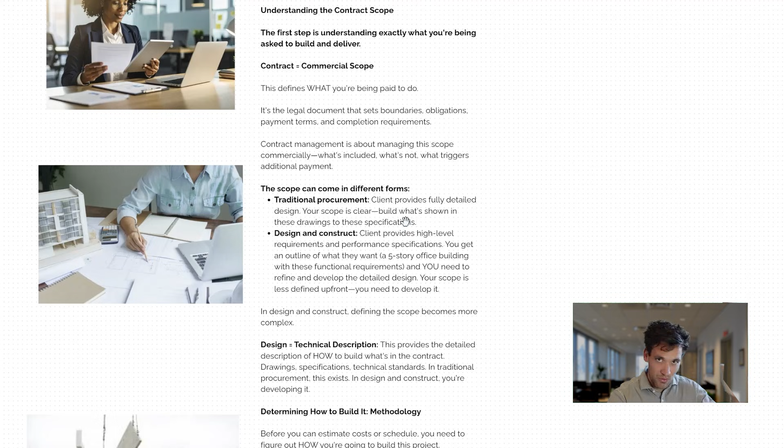So that's why, look, I know there are different procurement methods like alliances, cost plus, blah blah blah. But really, in terms of how most construction contracts are procured, when we're talking about between a project developer and general contractor, it either falls under this traditional construct-only procurement method or the design and construct method. And in design and construct, defining the project scope becomes much more complex, which takes us on to the design itself.

So the design is the technical description of the work. It's our drawings, it's our specifications that are telling us exactly what to build. These are the drawings that we can look at to work out how big the slab is, the depth of it, the density of steel reinforcement - basically what the product we're creating is.

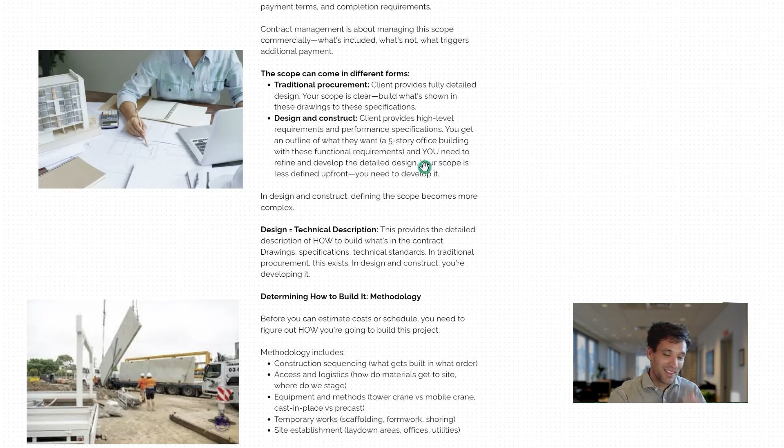Now, from the design - if it's a design and construct project, we'll only be getting a concept design or a rough outline, such as a project specification of what the client wants at this stage. Or if it's traditional procurement, we'll get an issue for construction design.

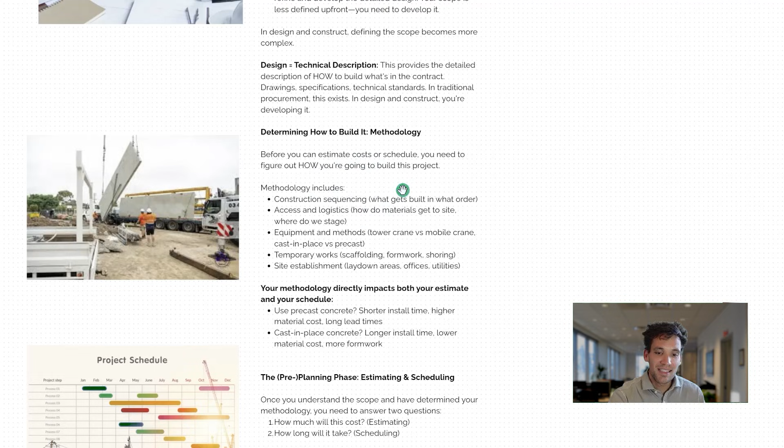We then move on to our next stage in the tender process. Once we've understood the project scope, we determine our methodology, which is establishing how we're proposing to deliver the project.

Now, if you think about it, you can't possibly produce an estimate or a schedule unless you understand how you're going to build something. Are you using in situ concrete, or are you going to be using precast? Are you going to self-perform the electrical works, or are you going to subcontract them? The methodology, our approach to delivering the project, is the key to both our estimate and our schedule.

Now, when I say methodology, I mean our construction sequencing, our access and logistics, our subcontract versus self-perform approach, our equipment and methodology, any temporary works we need, and our site establishment and layout. Are we having laydown facilities? What offices are we going to be having? What temporary utilities do we need to provide?

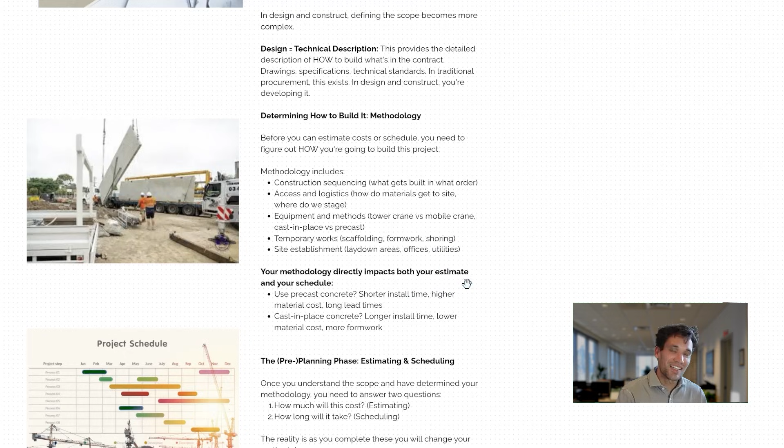This is the key to both producing an accurate estimate and schedule - properly understanding how we're going to deliver the project. Once you understand your approach for delivering the project, you can move on to creating your estimate and your schedule. Now, I'm listing these steps out sequentially, but they are iterative. When you go to price the project and develop your schedule, you're going to change your methodology. All these steps feed into each other.

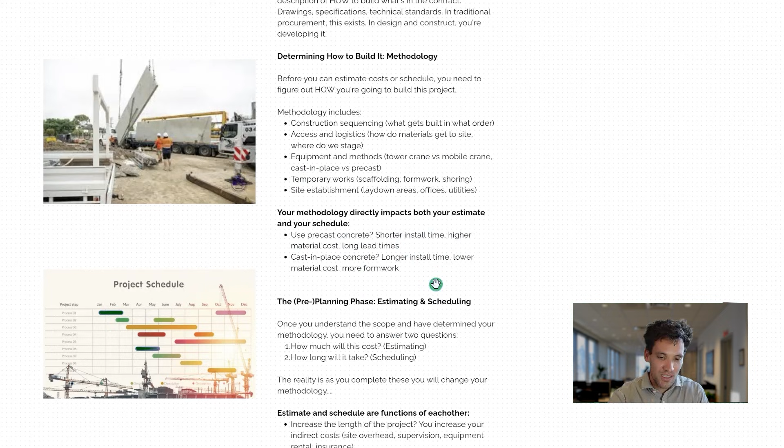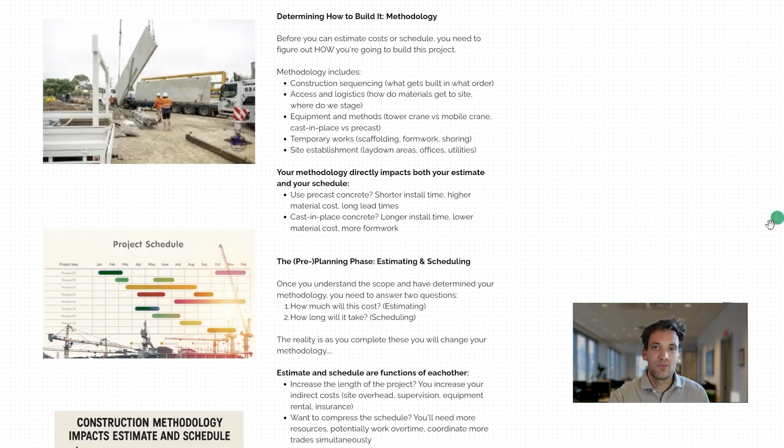If precast ends up being way more expensive than what you thought it would be, you might choose to go to in situ - it's going to take way longer, so again, you might choose to change the methodology. So these are iterative steps. Your methodology is going to be heavily informed by what things are going to cost and how long they're going to take. But fundamentally, you first need to understand the scope of the project, then you need to understand how you're planning to build it, and then from this, you can create your estimate and your schedule.

Now, as a bit of an aside, estimating tends to have this reputation as being a complicated skill or difficult to do. I actually think estimating is really quite simple. The hardest by far construction management skill that I see is scheduling. Estimating, working out how much something costs, is really working out what resources you need and applying rates to it. Obviously, it's a little bit more complicated than that. Scheduling adds this whole element of time.

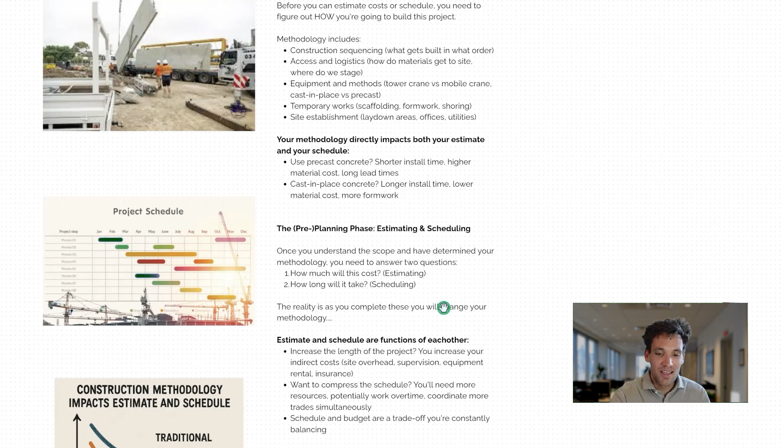You need to know the sequence that things happen, the way they relate to each other. You want to do enough detail that it captures the overall duration and you're estimating the planned finish date correctly, but you're not getting too into the detail that you're creating a plan that no one will ever follow.

I actually think scheduling is by far the most complicated construction management process.

Now, to prepare our estimate, again, we price our methodology. We work out what resources we need to deliver the project. To prepare our schedule, we work out how long each of these tasks are going to take and put them in the correct sequence and order.

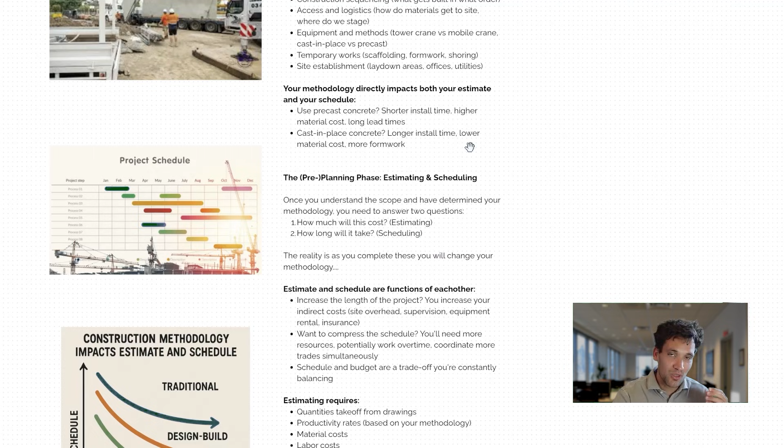Again, in the same way that these elements feed into our methodology, both the estimate and schedule will feed into each other. So if we increase the length of the project, it means we're paying for temporary office hire for longer, and for staff salaries for longer. So the schedule is actually a key input into the estimate.

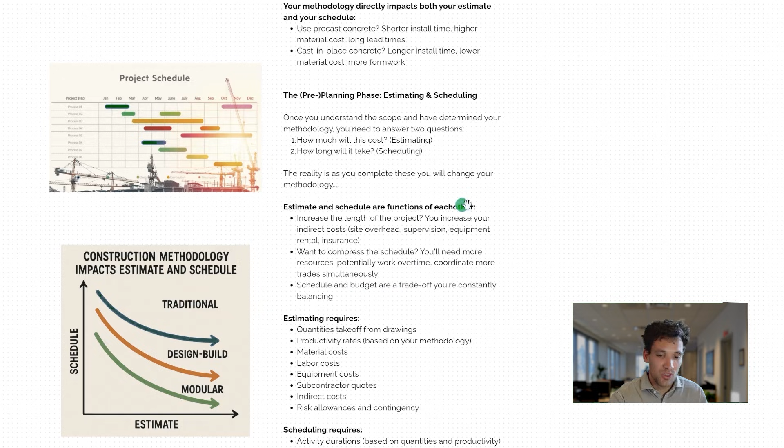On the other hand, if you're trying to get your costs for the project down, you may choose to change the sequence or methodology with which you deliver the project. You may choose to self-perform more things, in which case you need to allow more time to do it because it'll be continuous working of one work crew as opposed to using multiple subcontractors. So again, these two elements feed into each other.

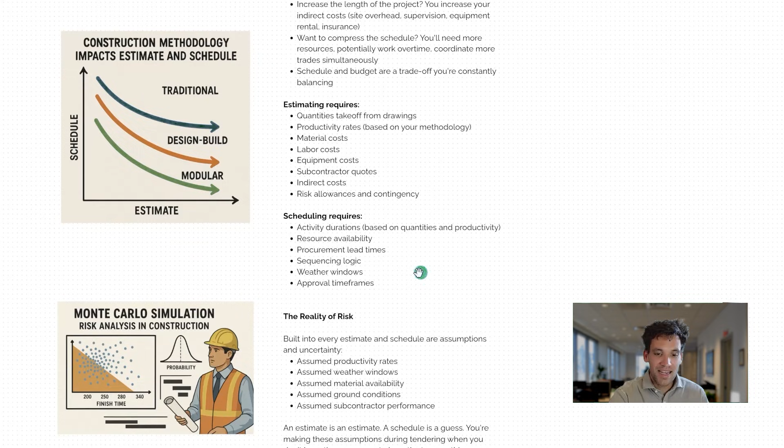Our estimate is going to be a function of our quantity takeoffs, our productivity rates for different tasks if we're self-performing, the material costs we're getting, the labor costs, the equipment cost, any subcontract quotes for packages we're outsourcing to other contractors, our indirect costs driven by the duration of the project, and any risk allowances and contingency.

Scheduling is going to be a combination of the activity durations, the resource availability, procurement lead times, the sequencing logic, what inclement weather we have to allow for, and what sort of approvals we need before starting the works.

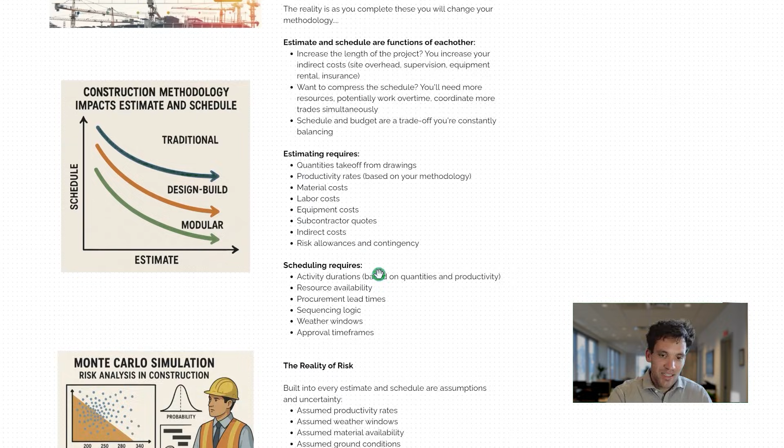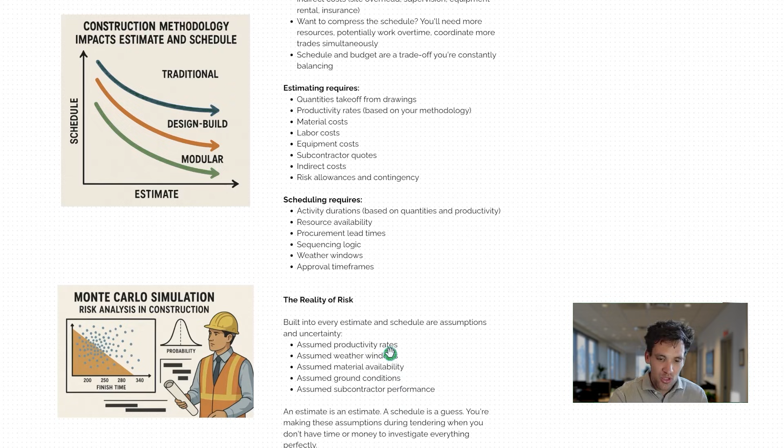Now, an estimate, a schedule, even a methodology is a prediction of how we're going to do the work. That means at this stage of the process, as we come towards signing a contract, we're introducing uncertainty and assumptions into our process. With our schedule and estimate, we're assuming productivity rates, amounts of weather, that we're going to get materials within a certain lead time, and certain ground conditions. Some of these risks we can quantify, some of them we won't be able to.

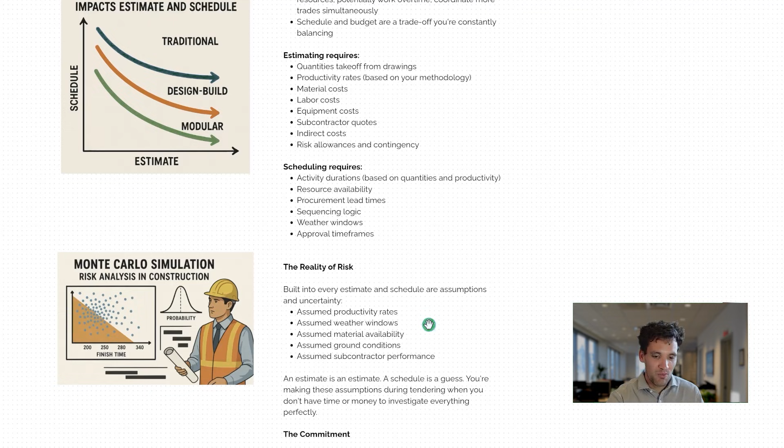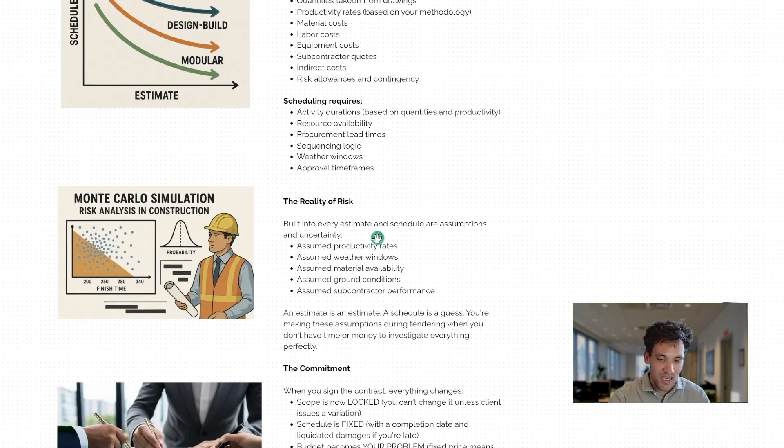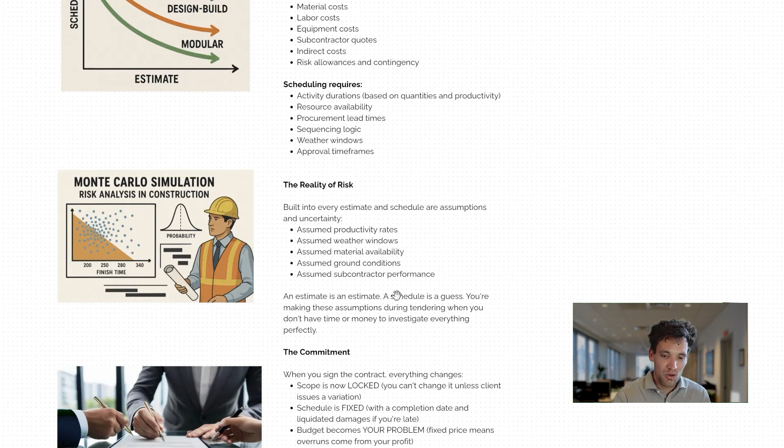So it's important to understand here, as much as we can do complicated things like Monte Carlo analysis and risk analysis, we are introducing uncertainty, and managing risk is one of the key responsibilities that construction contractors undertake. At the end of the day, as a construction contractor, you're providing a quote and signing a contract today to say, I can build this bridge for $5 million within 12 months. So it's important to understand that through this process, we're now starting to introduce uncertainty.

And when it comes to signing the contract, we're committing to taking responsibility and accountability for this uncertainty. So when we finally negotiate and sign the contract, if the client's happy with our price, schedule, and our proposal, the scope is now going to be locked in. We can't change anything unless through a variation from the client.

The schedule duration is now fixed. We're saying we can complete the works within a fixed time frame. If we go over that, we'll incur liquidated damages. The budget or cost of doing the works, assuming the scope doesn't change, is now our problem, and we are responsible for all the risk and assumptions we've made.

So step one, we've defined the project, we've agreed to do the works, the fixed works we've agreed to in the contract at a fixed price for a fixed duration. So we've defined what we're going to do, for how much, and for how long.

The next step in this process is to prepare. We're going to set up our project for success. This means developing an exact plan of how we're going to deliver the project in intricate detail, but also setting up guardrails that when it comes to delivering the project are going to help us stay on course.

The inputs to this process are going to be the secured contract, the tender documents, which will now become project documents as these were attached to the contract, and our preliminary schedule and budget we developed during the pre-construction phase. The outputs are going to be our detailed schedule, our exact plan for how we're going to do the work, our detailed budget and cost code set up, and our procurement complete, so we've negotiated and signed all our subcontract agreements.

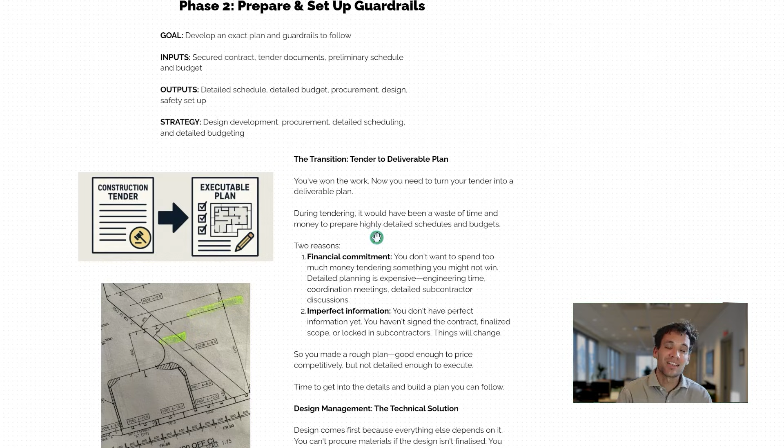Yes, we are on the hook for the project cost, the project duration, the project scope, but here's how we add detail to this and turn this tender into an executable plan. The point I'm making is we can't actually change our overall cost or overall schedule completion date because those are going to be fixed.

During the tender, it would have been a waste of time and money to prepare highly detailed schedules and budgets. So really, we're just taking this information and extending it out. During tendering, we don't want to spend too much money preparing a proposal for a project we might not eventually do. So it would have been a waste of money during the tender phase to create a very detailed plan.

On top of that, we just don't have the perfect information to complete the plan, particularly if it's a design and construct project where we're only doing the detailed design after contract signing. We can't actually create very detailed schedules and detailed budgets until we do have some form of accurate design.

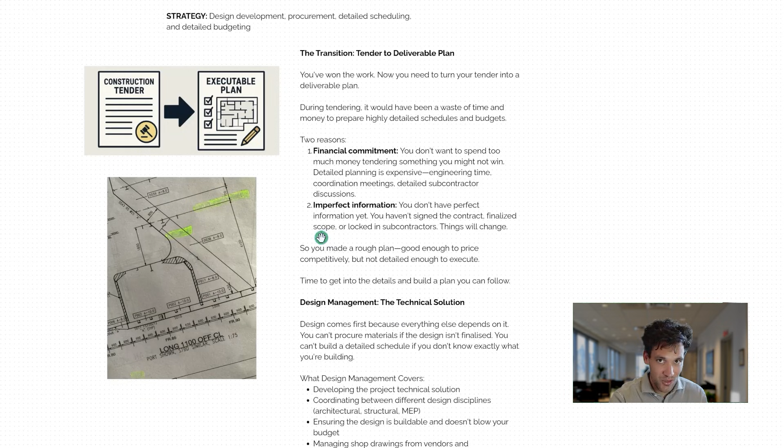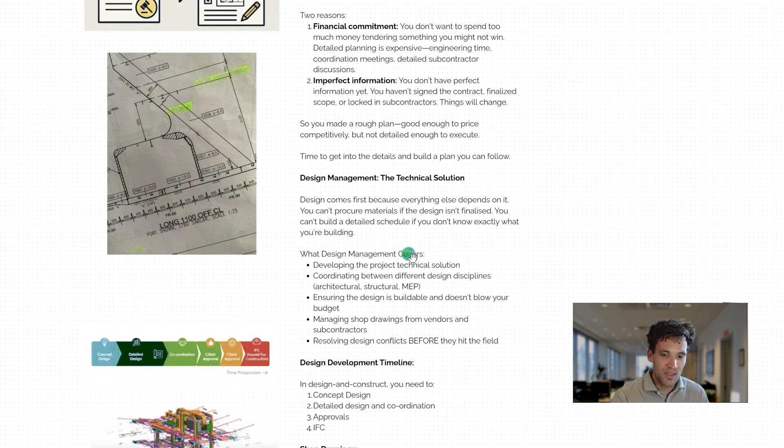Now, the start of this process is design management and developing the project technical solution. If it is a traditional procurement methodology or construct-only project, the client will be issuing us an IFC design. However, even if you do get a full IFC design, you will still have some design development to do through the procurement process. For example, shop drawings, fabrication samples - I would classify these as design development, where we are doing our detailed shop drawings, working out exactly what we're going to procure, and that would still have to be approved by an owner or architect.

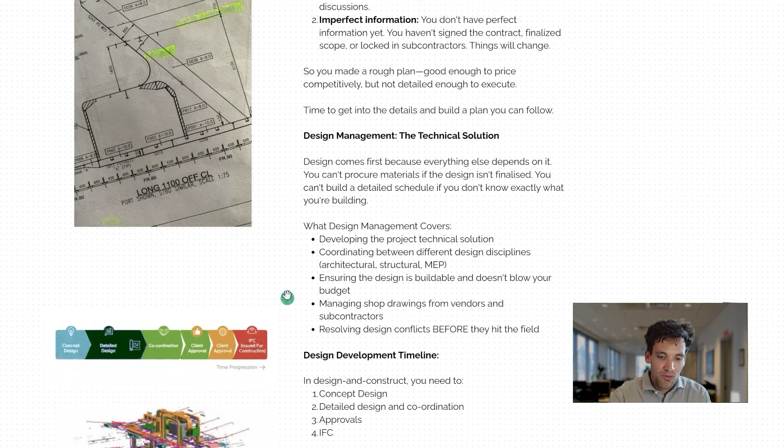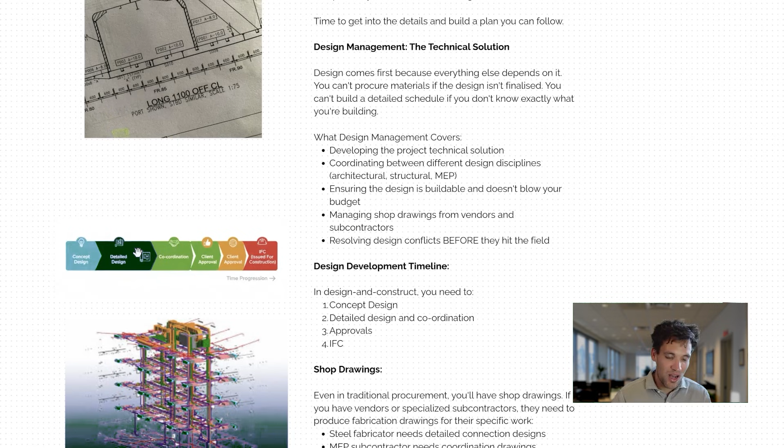Obviously, if we are performing a full detailed design as part of a design and construct project, the design management portion of this is going to be much more important. We're going to start with our basic concept design, which are the indicative requirements that we priced off at the tender. We then need to engage an engineer or architect team to complete our detailed design. They take all this concept design and work out, from basic sketches, exactly what we're going to build, how thick every wall is going to be, exactly where every light fitting is going.

Then we need to coordinate this design between all the different disciplines - MEP, structural, fit out, services, whatever. Then we need to get this design approved by our client. They have to sign off and agree to it. Then we can begin actually constructing towards this design and we get the IFC stamp.

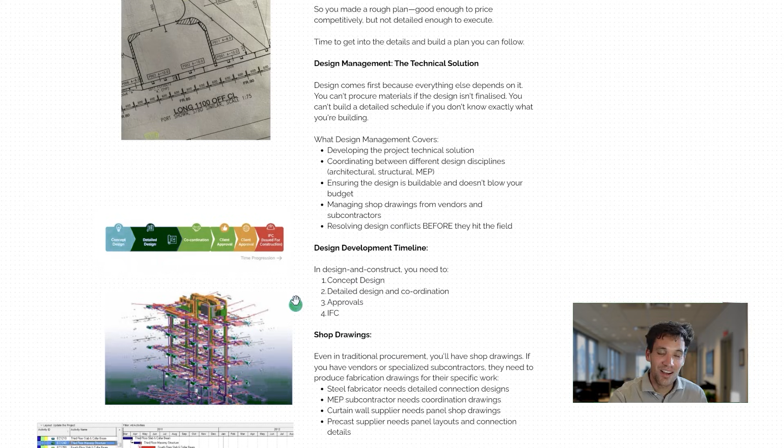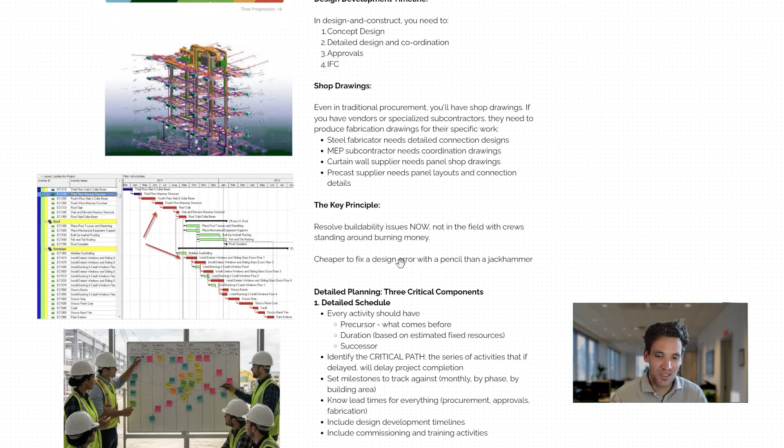Even under a traditional construct-only contract, you will have some level of design management, and this would come through vendor shop drawings, things like steel fabrication drawings or precast concrete drawings. The key principle behind design management is you want to resolve all the constructability issues on the drawings before you get to the project. Again, it's cheaper to fix a design error with a pencil than a jackhammer.

Yeah, the design is obviously going to be the basis of everything we do, as it's the instructions of what we actually have to build.

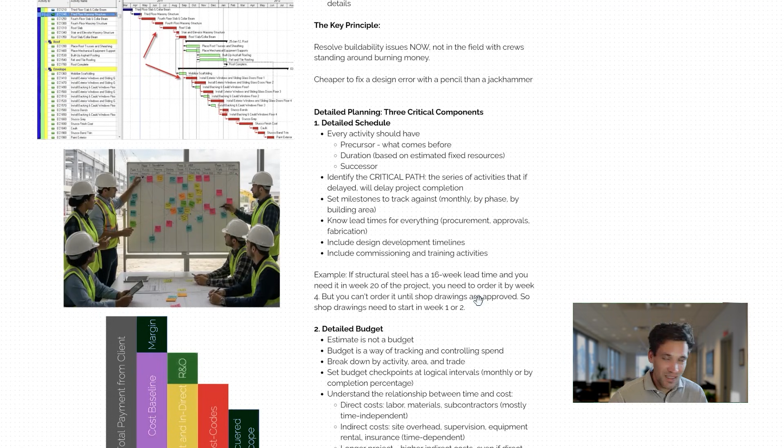The next part of the detailed planning phase is getting into developing our detailed schedule and our detailed budget. Now, I like to think of these two as our guardrails for the project. They're going to tell us, when it comes to project execution, have we missed activities? Are we falling behind schedule? Or for our budget, are we overspending in certain areas?

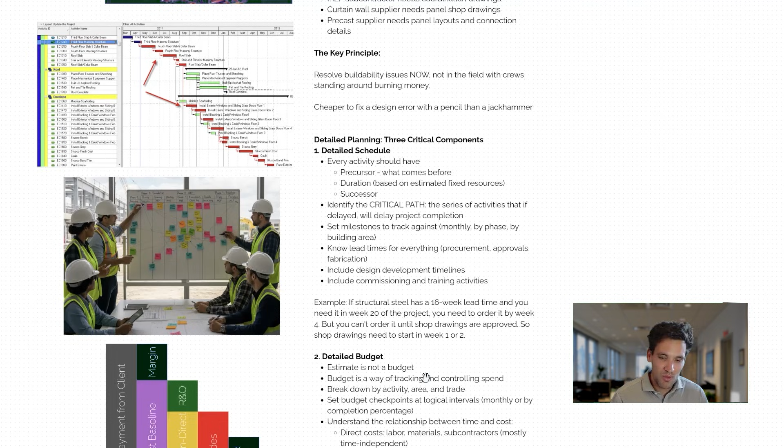The whole purpose of having a detailed schedule and a detailed budget is partly that it's instructions, capturing our plan of how we're going to deliver the project so it's easy to follow and communicate. But also it's a way of knowing as we go off track.

So our schedule captures our entire methodology. It captures every activity in the project, what comes before it - referred to as its precursor - the duration of the activity based on our estimated resources we're going to apply to the task, and also our successor: after that task is done, what comes next?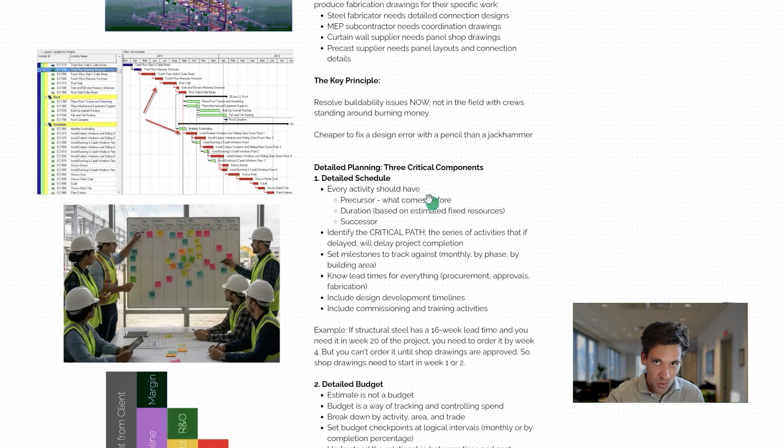The key concept to understand with scheduling is the critical path, and in my experience, most people use the term incorrectly. They throw it around everywhere. The critical path is the series of activities that, if delayed, delay project completion.

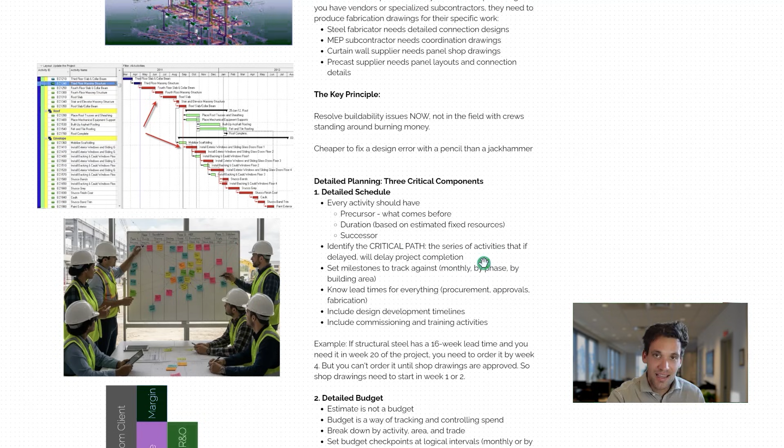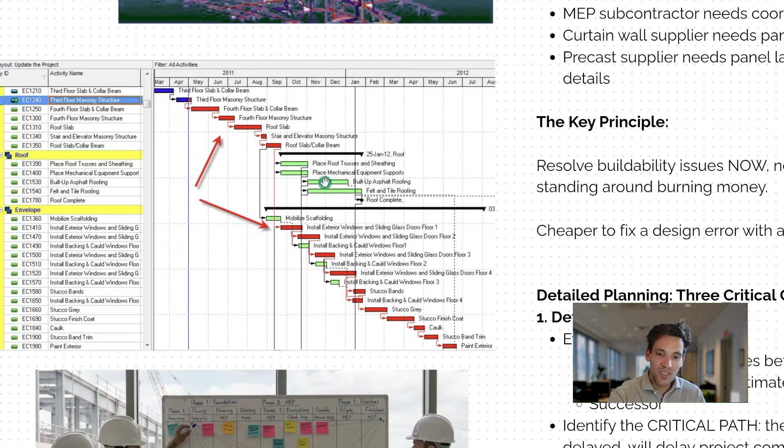So if you look at this simple diagram of a project schedule, you can see the activities in red, the way they're sequenced. If any of these activities push out, it's going to push out the finish date. These activities in green that aren't linked in that series of tasks, you can extend those activities and it's not going to extend the finish date. So the red activities are the critical path. The green activities have some level of float associated with them.

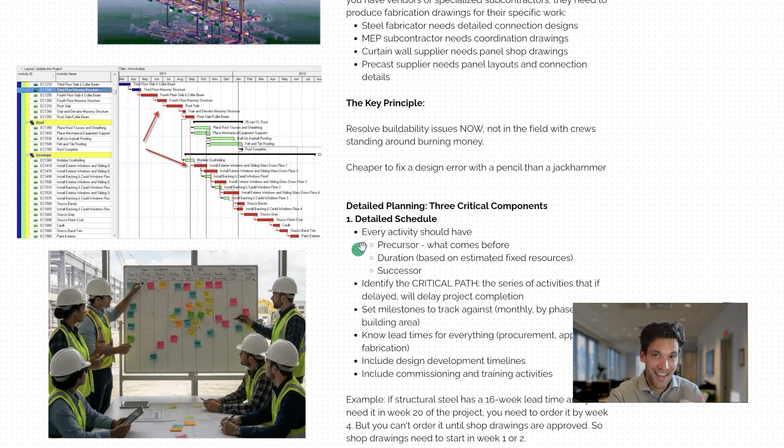Again, if you can delay an activity and it doesn't impact the completion date, by definition, it's not on the critical path. To put together this schedule, we need to have a really good understanding of the methodology. This means understanding the lead times for everything, procurement, fabrication, approvals by the client, the entire design development process, and any completion, commissioning, handover activities.

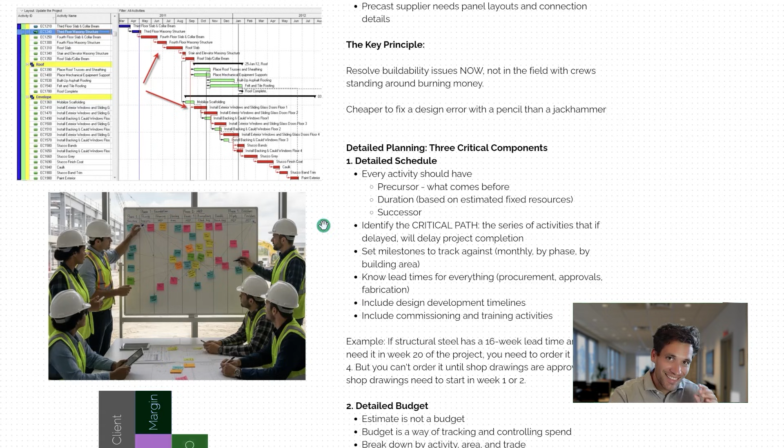Now, when these schedules are done well, they are instructions of how to deliver the work, but they also immediately flag when things aren't going right. Say, for example, we know our structural steel has a 16-week lead time and our installation, which is on the critical path, starts in week 20. If we know from this that we need to order the structural steel by week 4, and the shop drawings need 2 weeks to get approved, we know that if we haven't submitted the shop drawings by the end of week 2, we're already going to delay our completion date. And that is the power of correctly linked schedules. You know very early on when something is going to go wrong.

Now, in the same way we're going to develop a much more detailed schedule, we're also going to create a much more detailed budget. So to be clear, an estimate is not a budget. An estimate is a way of compiling all of the project costs, but it's done with the ease of pricing accuracy. It's not done to track and control expenditure.

For example, when you're pricing a project, say a concrete project, you might include formwork in every line item, but in reality, you're just going to place one order for all of the formwork for the project at the start of the job. In that situation, I think it's much cleaner and easier to track if you have a material budget called formwork material that applies to all the activities. When you're estimating, you want to allow for formwork for each of the tasks. It's hard to just make a bucket allowance for formwork for the whole project.

When you're talking about setting up a budget, you want to allocate your budget in a way that makes sense with how you're purchasing, how you're spending money. So for example, we know when we're ordering formwork, we order this amount, and if we go over what we've allocated for it, we're flagging a budget overspend.

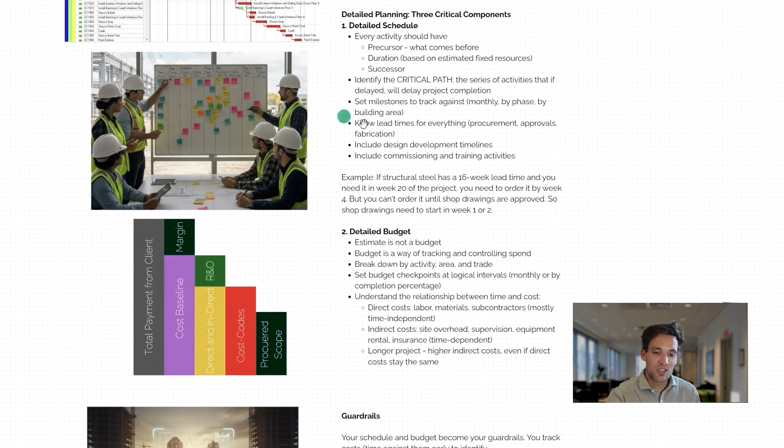Now, again, it's important here to understand the relationship between time and cost, to understand our direct costs, which will be mostly time independent tasks, which are going to be a function of our labor, materials, and subcontract costs. Also understand our indirect costs, which are going to be driven by the project schedule. Again, longer project means higher indirect costs.

Now, I don't want to keep going on and on about this, but the true value of detailed schedules and detailed budgets is you set up guardrails for how to deliver the project. You know whether you're overspending at the 15% mark rather than the 95% mark, where you can still do something about it.

Now, the next key thing we need to do in our pre-construction phase is our procurement, finding our subcontractors and suppliers who are going to be doing the work. The procurement process isn't rocket science. It starts with packaging up the works. We need to take our entire project scope and break it down into all the packages we're going to procure from the market.

Goal here is we don't want any gaps between these different trades. Scope gaps means variations later down the line. Each package, we're going to have to then prepare a clear scope of works, put together the relevant drawings, specifications, and schedule requirements. My litmus test for is there enough information in a tender package is you have all the information you would need if you were pricing that package of works.

The key driving point for when we can actually start putting together these packages though is going to depend on the design process. Again, if it's an issued for construction design, it's traditional procurement and we can start this the day we sign the contract. But if we're waiting for the design to develop sufficiently, that's what's going to be driving this start date.

We then want to get multiple quotes for each package of works. That means sending it to 3 to 5 qualified subcontractors who any one of them has the correct safety record, quality record, capacity, financial capacity to deliver the project. Any one of the people we'd send the package to should be able to do the work.

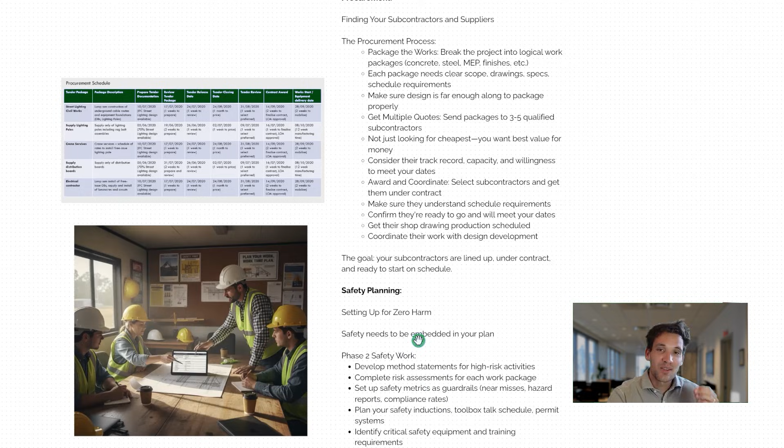If we know before excavation, we need to properly identify all of our services, we should factor that into our schedule. If we know that before setting up a crane, we need to build a proper crane pad and get a temporary works design for that. Again, all these activities should be on our schedule. We should be considering them early on to effectively mitigate any risks before the work starts.

Okay, so we've got our detailed plan, our budget, we've completed our design, we've signed up our subcontractors and suppliers, and we've considered the risks and safety associated with doing the work. We're now ready to implement and execute the plan. The goal here is simply to follow the plan we've created and then identify and correct any deviations. The key input to this is going to be the detailed plan and guardrails we set up in phase 2. And the output is the correctly completed project on time, on budget, and with 0 harm.

Strategy is insanely simple. We're going to follow the plan we've created. We're going to track what's happening carefully. The second we go outside of our guardrails, the second an activity slips or we're overspending, or we can forecast we're overspending, we're to course correct. Then we need to manage change because change will happen on that project. And we also want to report on performance.

The implementation phase, we're spending money to get work done. This is where our plan meets reality. Now, a lot of project management courses don't talk about this concept, but to me, it's mind-blowing that they don't, as it is the fundamental part of this process, is implementing the plan and making it happen. This basically means you communicate the plan to the people doing the work in a clear, concise way. You follow up to make sure they're actually doing it, and then you make sure it happens with no excuses.

Now, this is probably the part I hate the most about construction in general, is that sometimes it's just a brute force game. For example, say you've got a concrete pour scheduled for tomorrow. The batch plant where you're planning to order the concrete from calls up the night before and says they've got a breakdown, so they can't fulfill your order. As we all know, this is construction. This stuff happens every single day. The solution to this problem isn't anything smart or fancy.

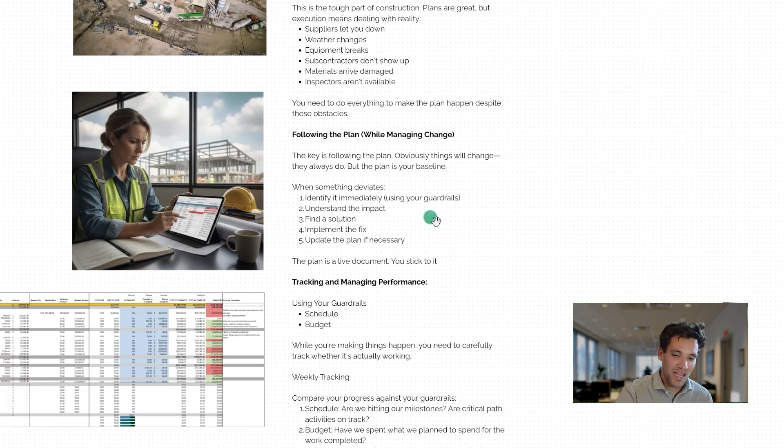Now, the key here is following the original plan. The original plan is your baseline, but we all know things are going to change. So what happens when something changes? You need to identify it immediately using your guardrails. You need to understand the impact, find a solution, implement the fix, and then update the plan.

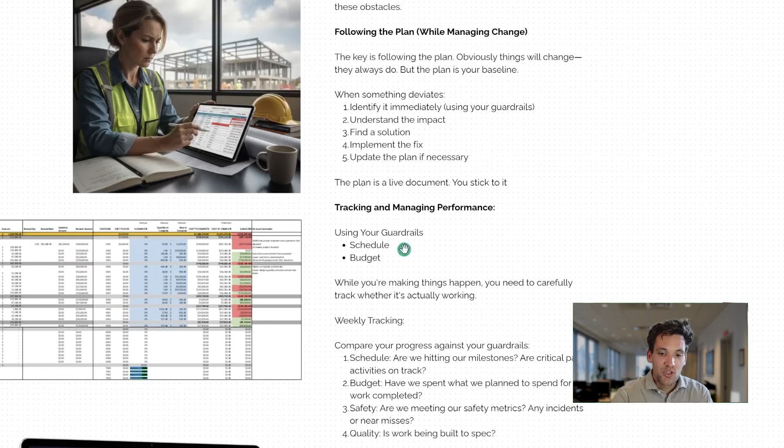The plan isn't meant to be something you create during the pre-construction phase, then refer to every so often to the end of the job. It's a living document. It needs to be updated as things change, as new information becomes available. Now, we track and manage our performance using our guardrails. This is our schedule and our budget.

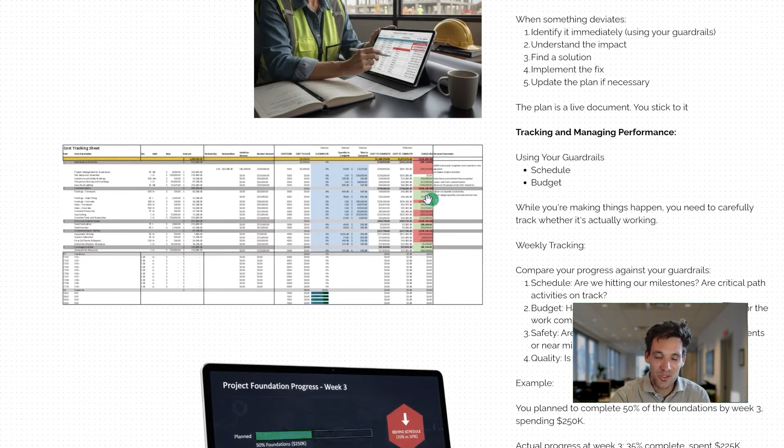For example, here is an example of a construction budget. Again, you can't even see the detail, but you can instantly see the cost codes where there is an issue. The way we identify these issues is one, having our guardrails, but also tracking what's going to be happening. Every week, as a minimum, we should know, are we hitting our milestones? What percentage complete is each task?

Every day we're working, we should be measuring how much work's getting done versus how much we're spending. What materials are we buying? How much are we spending? And then we also want to apply the same philosophy to our safety by tracking key safety metrics, monitoring site performance, and also our quality. This is where we start to check and verify that things are being done correctly, which I'll talk about a bit more in a second.

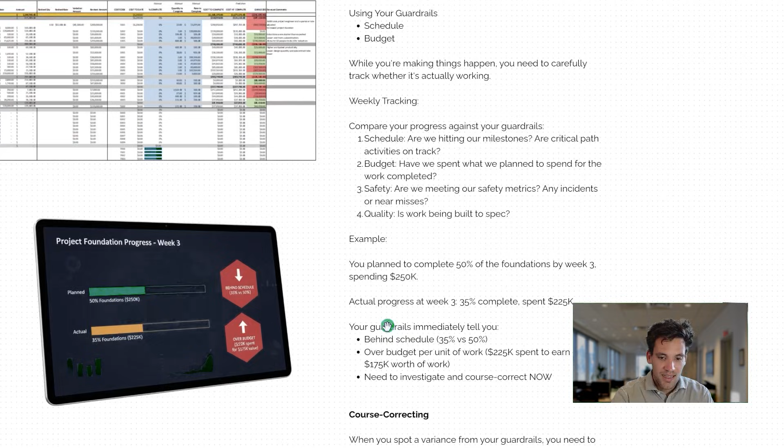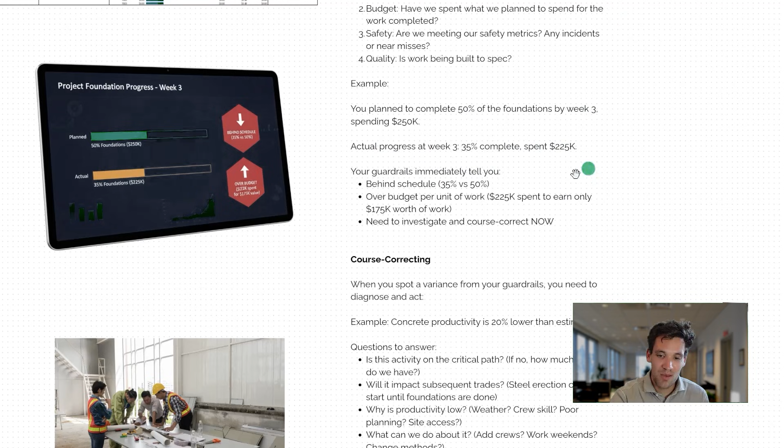Now, the power of this is we have an objective way to track whether the plan is being implemented correctly. Say, for example, we plan to complete 50% of our foundations by the end of week 3, spending $250,000. Our actual progress at the end of week 3 is we're 35% complete and we've spent $225,000. We can see from this that we're behind schedule. We're at 35% when we should be at 50%.

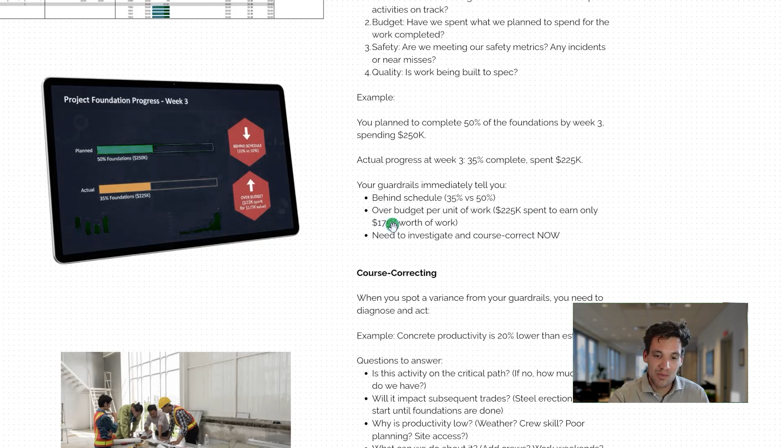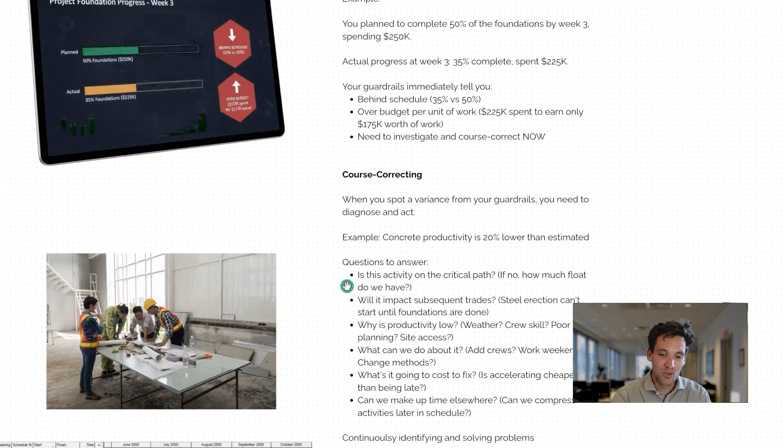And we're also over budget per unit of work we've completed. We spent $225,000 to get 35% when we should have only spent $175,000 if we're going to hit our $250,000 by the time we're 50% complete. Again, the power of this is we have objective numbers. These are going to be flagged with a big red mark in our budget and our schedule, and we instantly know that we've got to do something about it before we get to the end of it and then realize

we've blown our budget. Now, when we spot the variance from our guardrails, we need to diagnose and act. For example, say our concrete productivity is 20% lower than we expected. First, ask things like, is it on the critical path? If it's got float, maybe this isn't necessarily going to be a problem. Are subsequent trades going to be impacted? Do we have to update our subcontractors? Do we have to change our sequence going forward?

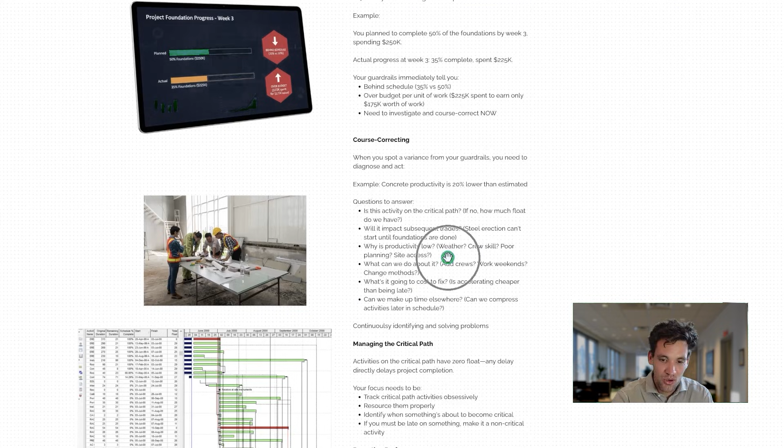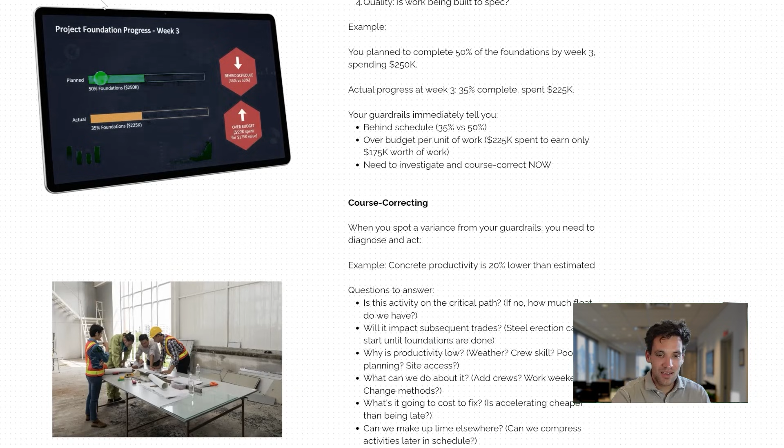We can look at why productivity is so low. Is it because of poor planning, or is it because of the weather and site access? What can we do about it? Can we work weekends? Is it worth working weekends and spending extra money on overtime if it's not a critical path activity? What's the cost of fixing it? And can we make up time elsewhere? Really, again, it comes down to having these flags from our guardrails, but then also being able to properly understand

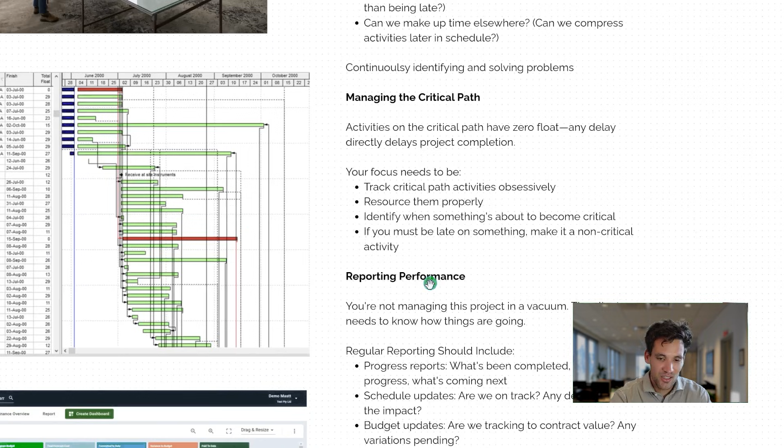what's happening and why. Now, throughout execution, the key thing you're going to have to pay attention to is the critical path. I've already discussed what this is, but it is the series of activities that, if delayed, delay project completion. When you see a schedule like this, you see the red tasks, you see the green tasks, you can see that that task is critical path, that task is critical path. Those are the ones affecting the completion. Now, some of these other tasks probably have very little float.

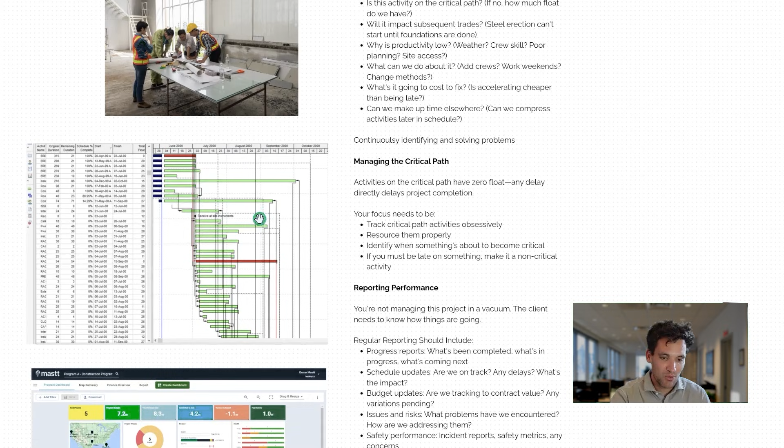It's also important to be aware that activities with very low float near the critical path, I would almost just call them part of the critical path, because our schedule is never going to be that exact that we can categorically say this is the critical path or not. But you instantly know that these activities, if delayed, impact project completion, but a delay to this activity, which has a lot of float, it's probably not a big deal, so it's not worth spending money to recover the time.

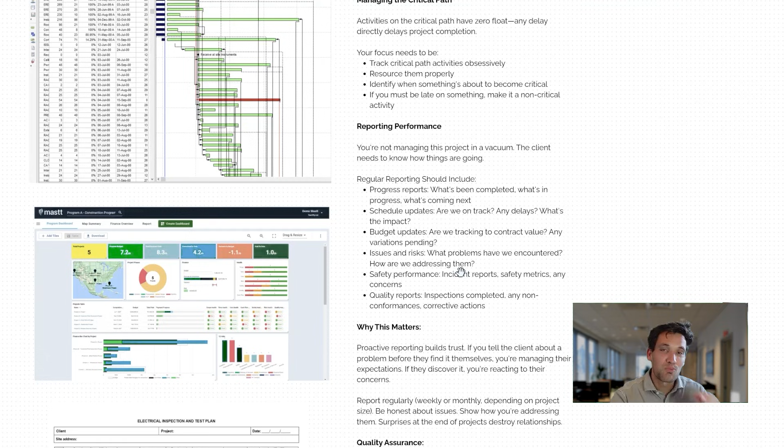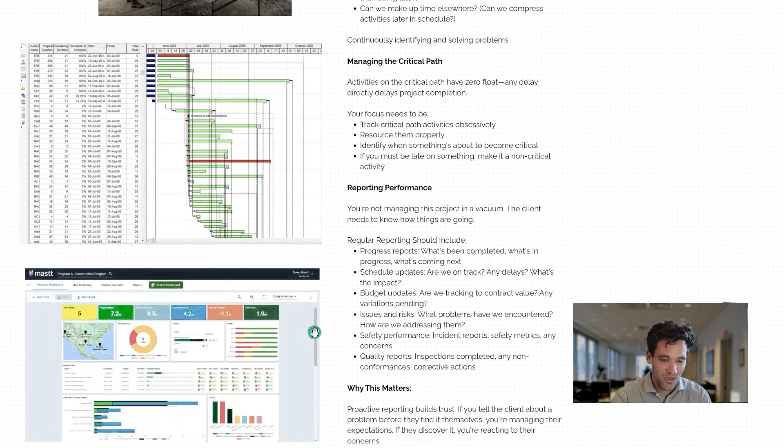Now, throughout this other process, if we go back to remembering what our main project objectives are, is we want to keep our client happy. The way we do this is reporting on progress and keeping them informed of what's happening. That's when we get into reporting performance. We're not managing the project in a vacuum. Our client wants to be informed and see what's happening. So being able to take all this data we're getting from tracking performance for our detailed schedules and budgets and aligning all these things together, we want to put it into some sort of simple dashboard like this.

We want to generate progress reports, schedule updates, budget updates, any key issues and risks, safety, performance concerns, and quality concerns. This is going to be important for building trust with our client because we're proactively showing them what's happening. They can then go tell their other stakeholders what's happening. Even if we get the exact same end outcomes, the fact that we've constantly been updating them and showing them how the project is progressing, they're going to be way happier.

Now, quality is an incredibly important part of implementing the actual construction work, and there's a whole lot of complicated definitions for construction quality. I just simply think of it as checking that what we're building is correct. This really has two key benefits. It helps us fulfill our contract obligations. We can provide evidence to our client, our completed inspection test plans and test reports, that we have completed the work correctly. And it also is going to help us to prevent mistakes. We don't want to overcomplicate it. It's really about fulfilling those two objectives.

Now, I'll fly through the quality process, but it's actually not that difficult. So the quality assurance process is as follows. First, you want to identify all the inspection and testing you're required to complete. So you're going to get this from the contract requirements, the work breakdown structure, and any applicable codes and standards. These are the required testing you need to do to keep your client happy. You might also choose to add optional testing to help support the second objective, which is preventing mistakes. Don't overcomplicate it. It's either required in the contract or you're doing it to help prevent mistakes.

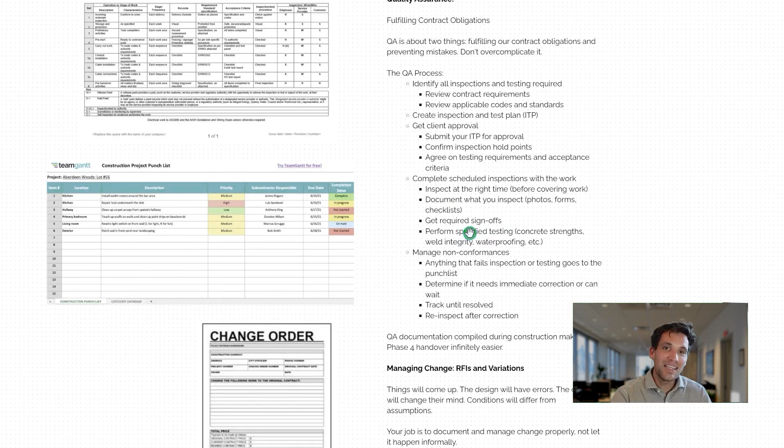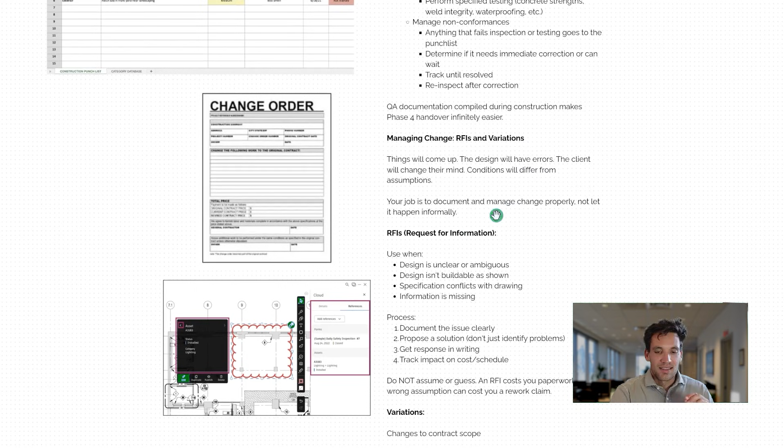Now, the biggest mistake everyone makes with quality, and as much as anyone says it, you just have to do this in parallel with the work. If you leave everything to the end of the project, it'll be a disaster. It'll be hell to close out. You have to do this in parallel with the work being performed. As you're doing the testing and inspections, any non-conformances that you pick up, you simply add to the punch list, which is a register of everything you have to fix before completing the work. Again, if you do this during construction, it's going to make phase 4, which is closeout of the project, 1,000 times easier.

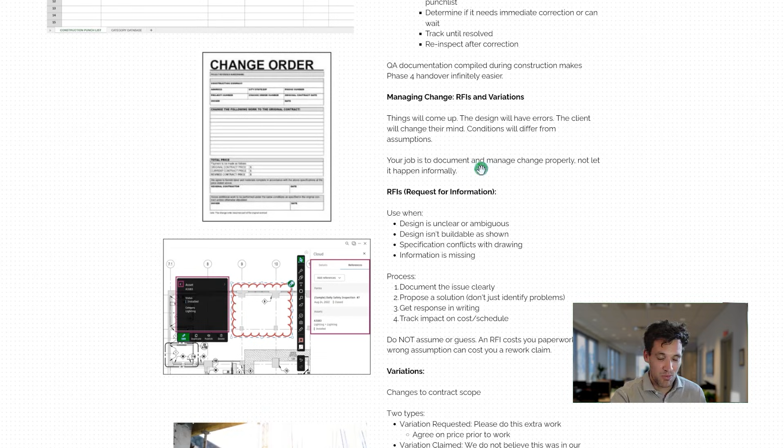Now, we all know the drawings aren't going to be perfect. There's going to be things people haven't thought about. We're going to come up with better or smarter ways to do things during construction. So that's where we get into this idea of change. No plan is perfect. Things will almost certainly change. Our job is to manage this change, both document it, record it, get approval for any changes we're proposing, and then to also manage the cost and schedule impacts of it.

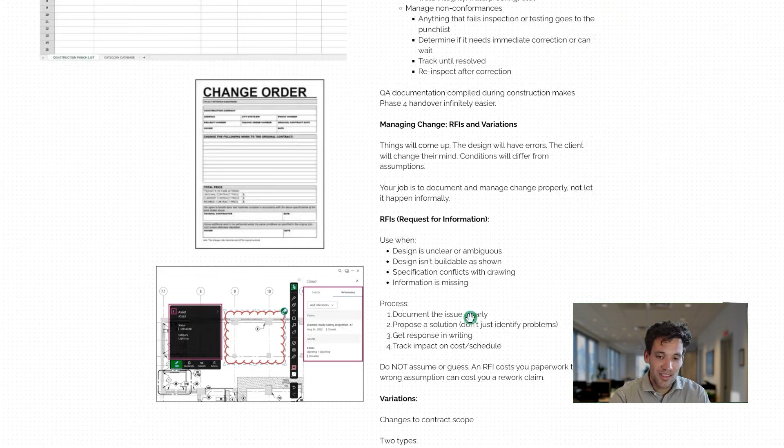Really, I categorize change into two key areas: our RFIs and our variations. RFIs are when we're proposing to change the design, so we want to change what we're building specifically. So we want to change the width of a concrete slab, we want to change the location of a penetration, we want to change the type of cable we're using. That is when we use a request for information.

This is when the design is unclear or ambiguous, the design isn't buildable, specifications conflict with the drawings, or information is missing. To prepare an RFI, all we do is document the issue clearly.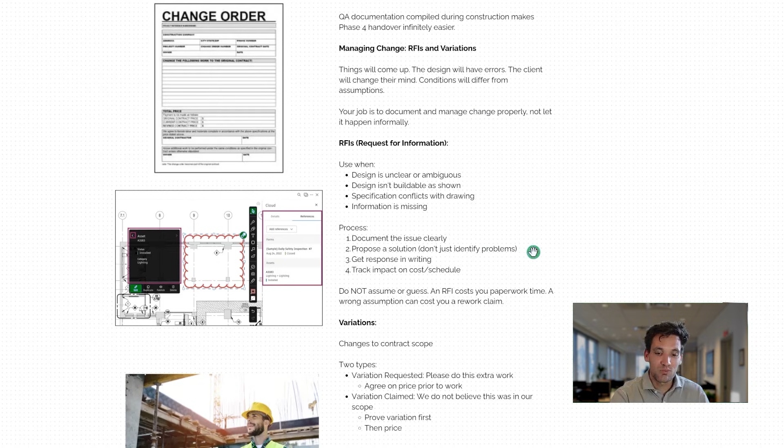We propose a solution. This is very important. I'll never raise an RFI unless I'm proposing a solution to the problem that I think is the best solution. I would never just blindly ask a design team what to do. I always propose something and suggest something that we think will work.

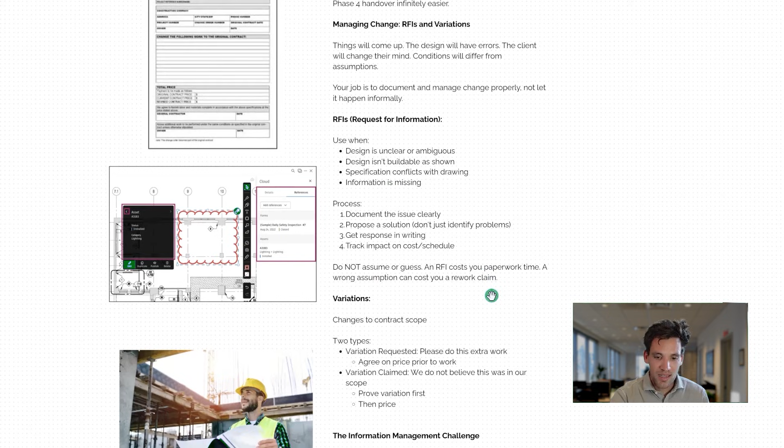Then you want to get your response in writing and track the impact on cost. Now, the biggest thing I see a lot of people doing, which I think is crazy—I don't know whether they do it to prove how much they know—but a lot of people just solve their own RFIs, which as a construction engineer and construction manager is 100% not your job to do. So always go back to the designers or the client to get approval for any change, which is the purpose of the RFI process.

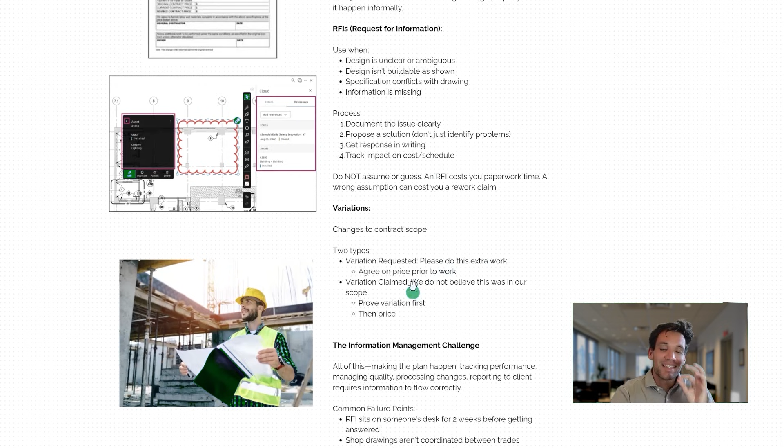The other impact of change is through variation. This is where our client proposes variations to us, or we have to manage variations with our subcontractors when scope changes. There are two key types of variations. There's a variation requested, where the client or whoever is asking us to please do extra work, which basically means we just have to quote to do the work and agree on the price prior to doing it.

Then there are variations claimed, where we are claiming a variation, or our subcontractors are claiming a variation to us, where they believe something is in or out of scope, and we're going to negotiate with them. The strategy everyone uses with this is you always want to prove the variation exists first, and then price it.

Now, all of this work we're doing comes down to managing information, making plans happen, tracking performance, managing quality, processing changes, and reporting to the client.

One of the key things you have to think about and manage during a construction project is the flow of information. We always run into issues where maybe a designer's communicated an RFI, but no one's actually told the people doing the work about it.

Shop drawings are submitted to us, but we never submit them to the client for approval. Budget reports or the correct budget numbers don't reach the project manager, who reports on something else. Schedule updates aren't communicated to our subcontractors, so they mobilize the site on the wrong day.

The more you think about one of your core roles as a construction manager or contractor being managing the flow of information, the better you will be at successfully coordinating work.

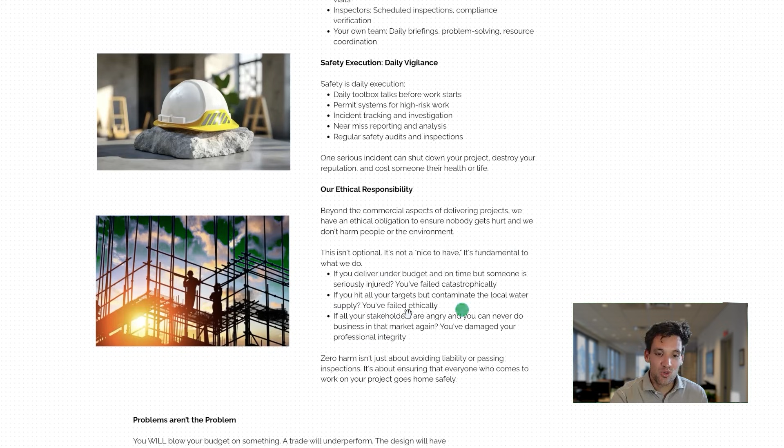There's a huge part of this which is just working with other people to solve problems proactively. And again, our ethical responsibility always has to be at the front of our mind, which is to make sure the works are done safely and to manage any risk.

Now, the last thing I want to leave you with is this idea that problems aren't the problem. The whole point of this framework isn't to prevent problems happening. There's nothing you can do to prevent that. Trades will underperform, the design will have errors, weather will delay you. All these things are going to happen.

It's really just about having a framework to catch these problems fast and fix them before they cascade. The difference between a successful and a failed project isn't whether problems occur, it's whether we catch them fast enough so we can do something about them. Okay, phase four, completions—by far the easiest thing we have to do, but the most poorly managed.

Every project I've worked on struggles with completion, but it is by far the easiest thing we do. The goal of the completions process is to successfully hand over the project to the client. The inputs are the completed construction works and all the compiled documentation, like our QA documents through the construction process, and the output is our client accepting the project, the final payment claim, and the contract closed out.

The way we're going to do this is we're going to identify what the completions requirements are, execute a completions checklist, deliver the documentation, and manage defects and close this out professionally.

Completions is something all projects struggle with, and in my opinion there's no good excuse for this other than everyone ignores it to the last possible second. So the core message I want to give you, and what will solve all your completions problems, is you need to start planning for completions in phase 1. You need to start thinking about how you're going to hand over the project before you even sign the contract.

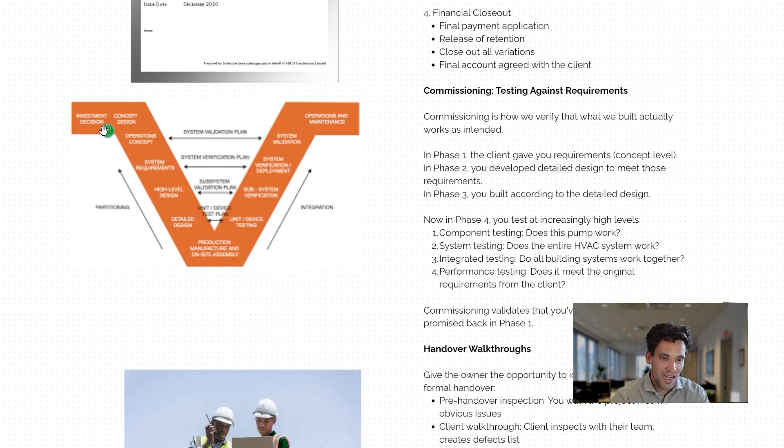Commissioning, I like this diagram of the systems engineering V, because it really helps me think about the role of requirements, commissioning, and construction. Initially we get our project requirements, like we want lighting on our freeway, we want CCTV camera coverage. These then get integrated into the design, and the detailed design shows us where every single light goes, where the cameras go, and so on.

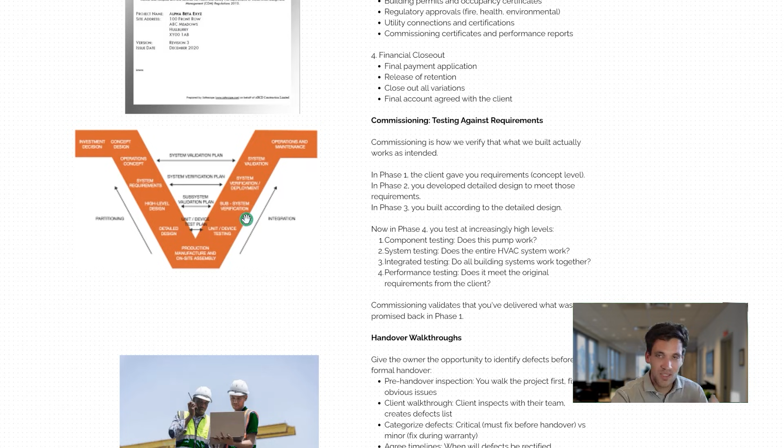Commissioning, you can think of it as working your way up the requirements on the other end. Construction QA simply checks that we've installed what the drawing tells us. The commissioning process slowly checks that each camera turns on and is correct, that the light fittings work, that each light fitting obtains a certain amount of light readings. And then we slowly test the entire system until eventually we've checked that our entire CCTV system can be controlled from the operator's control cabin. So commissioning really validates that the requirements of the project have been fulfilled, not just that we've built as per design.

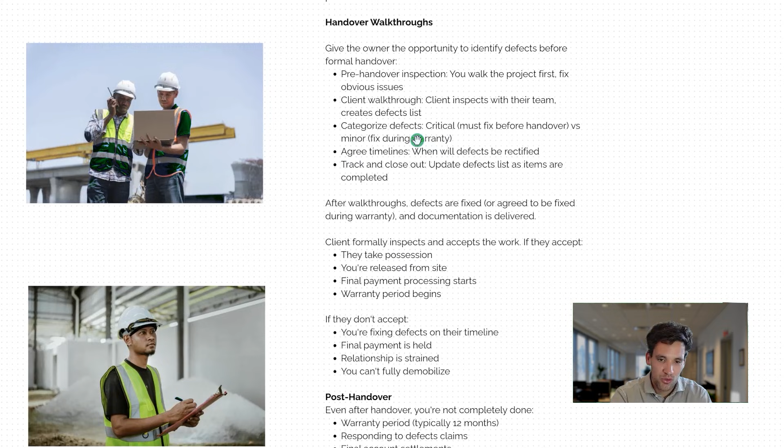Another key part of this process is the handover walkthroughs with the owner. This is where we give the owner an opportunity, and we work through this with them, to perform formal inspections, to inspect what we've built, review our QA, and prepare their own formal punch list of things they'd like us to close out to complete the works.

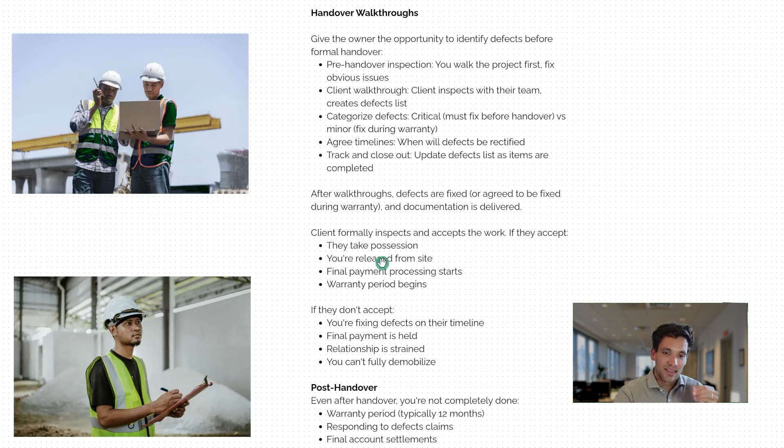The punch list we develop through the quality assurance process is our internal punch list. With the client, the handover walkthroughs we complete with them form their punch list with us, which forms part of the contract closing. They'll inspect things, pick up things they don't like or aren't happy with. That goes on our client punch list, and we work with them to close these out.

The reality is, even after handover, once we close everything out, complete the punch list, they've accepted the work, done the training, handed over the spare parts, we're still not even done. All construction contracts have some sort of defect liability or warranty period, and we need to respond to any defect claims. These are defects that weren't picked up during the work but we still have to go back and fix. Ideally, though no one ever really does this, we also want to capture any lessons learned throughout the execution of the project so we don't make the same mistakes again.

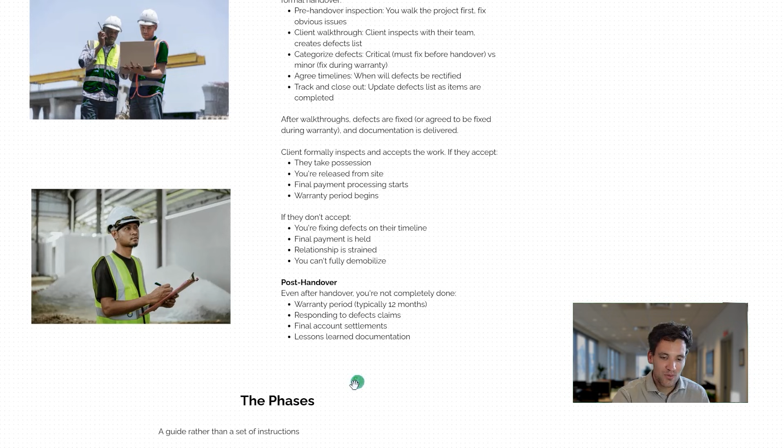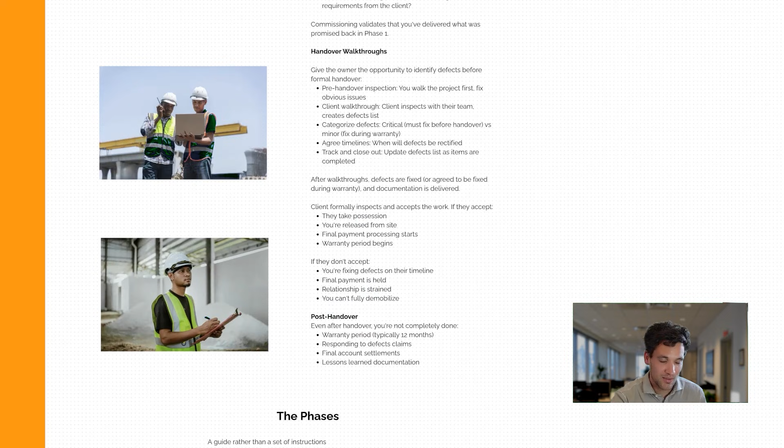So, these are the four phases. Again, it's a guide rather than a set of instructions, and understanding the phases is a way of grouping and organizing your tasks and thinking. Every project is different, every project is unique. This is a guide or framework to help you deliver projects. How well you can follow and implement this guide comes down to your skills.

There are really three core capabilities I see for being a successful construction manager, someone able to reliably deliver projects well: technical knowledge, communication and people skills, and the ability to manage information.

Your technical knowledge means understanding what's being built and how the construction process works. You need to read and interpret drawings, architectural, structural, electrical, or civil. You need to understand construction methods and sequencing, how we go from drawings to a finished product, know the different materials used, their properties and limitations, recognize constructability issues, and understand how different systems interact. This technical knowledge underpins every construction management task. If you don't understand how things are built, all you're really doing to some degree is data entry or administration. Try putting together an estimate without understanding how a project is built, or creating a schedule, or managing a contract.

You're completely reliant on the input of others. Fundamentally, to manage any construction project well, you do need to understand construction. So, for example, say we want to do an RFI to change in situ concrete to precast concrete. That's a technical solution. We need to understand how this is reflected in the different processes, how it's reflected in cost, what are the different costly options, how long are different options going to take, what are the safety implications, which contractors do we go to, and how do we scope out the procurement. Really, the impact of that RFI is completely driven by the technical proposal.